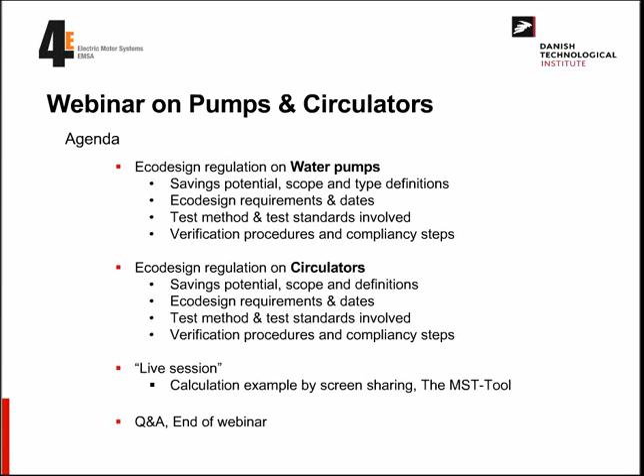As said, today's topic will be pumps and circulators and Ecodesign. The agenda will start on water pumps, talk a little about the Ecodesign regulation, what's been regulated so far, and how we actually do the compliance testing, at least in my part of the world, in Denmark, where we've done a lot of compliance testing on motors, pumps, and fans. I will demonstrate how to perform it, both for water pumps and circulators, which are two very different things. Finally, I'll try to illustrate an example on the motor systems tool in a live desktop sharing session, which we will hopefully succeed in today.

Yeah, this is just me, I don't think we need that. So let's get on to water pumps.

First of all, the regulation on water pumps was decided and published in the European Union Official Journal in the summer of 2012. It was called 547-2012, and it was based on the findings of the preparatory study of Lot 11, done years earlier by a different group. The first tier of the regulation started on January 1st, 2013, and the second tier in 2015, January 1st. So both tiers are actually active at this point in time.

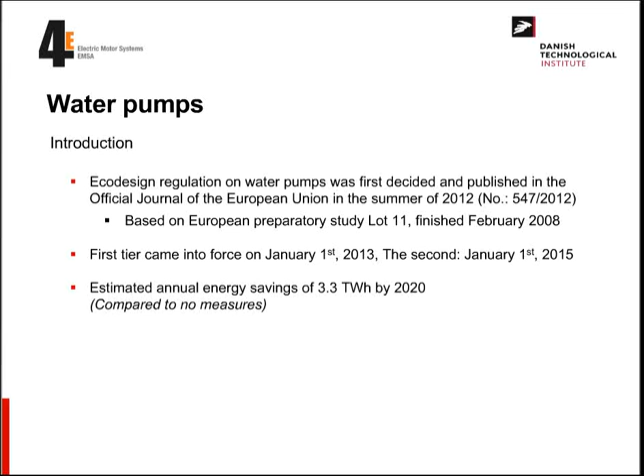From the preparatory study, we expect something like 3.3 terawatt-hour savings in 2020 due to these measures, compared to no measures at all. Another important thing to realize is that this regulation focuses on the component, the pump as a component - the efficiency of the pump itself, in this case 3 duty points. We do not take duty cycle or load profile into account in this regulation on water pumps. So that's good to know.

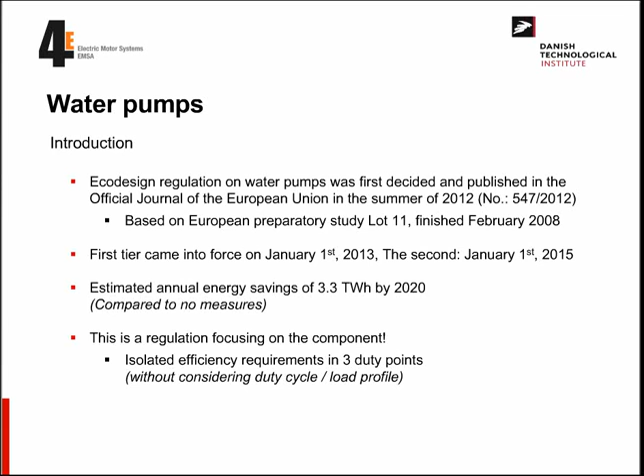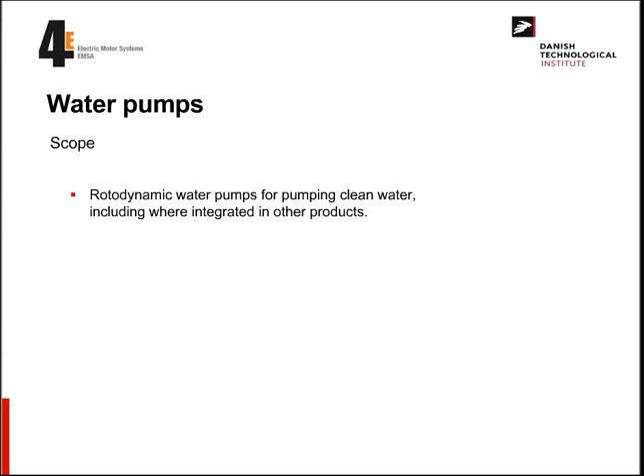The scope of the regulation is basically rotodynamic water pumps for pumping clean water, including pumps integrated into other products - quite a large scope. There are a few exceptions: water pumps designed for water below -10 and above 120 degrees Celsius are excluded. Also, firefighting water pumps are outside the scope. Displacement water pumps are outside the scope, and self-priming water pumps as well, outside the scope.

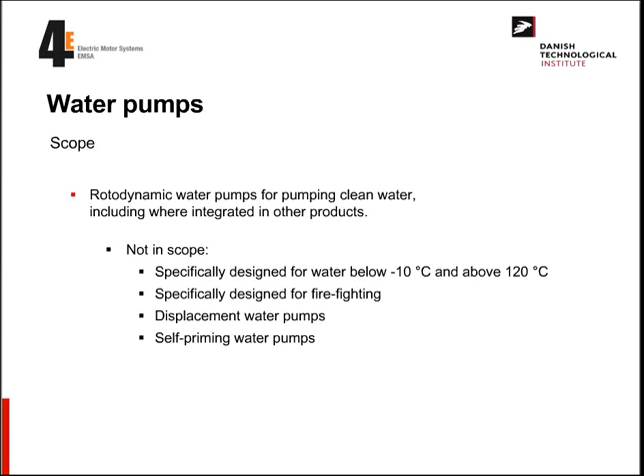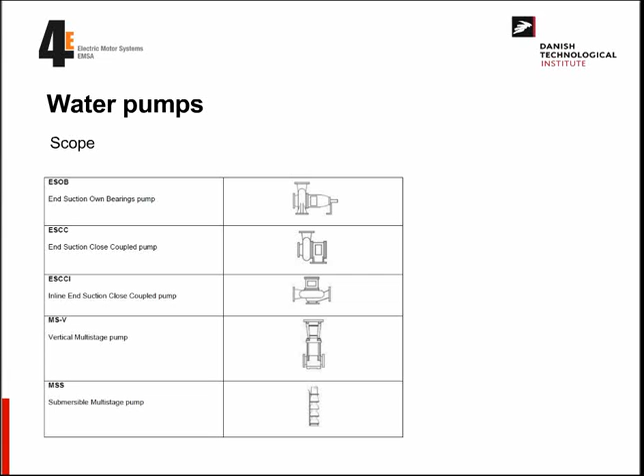When we look at the actual water pumps, there are 5 types recognized inside the regulation. 3 of these are what we call end suction pumps, and the more detailed limit of the end suction pumps is that they have to be designed for pressure less than 16 bars. The specific speed of the pumps has to be between 6 and 80 RPM. The rate of flow has to be above 6 cubic meters per hour, so the smaller ones are excluded, and the maximum shaft power is 150 kW, so the very large ones are also excluded. For the 4-pole machines, we have a maximum of 90 meters of head, and for the 2-pole machines, 140 meters of head as a maximum. So that limits the scope a little bit.

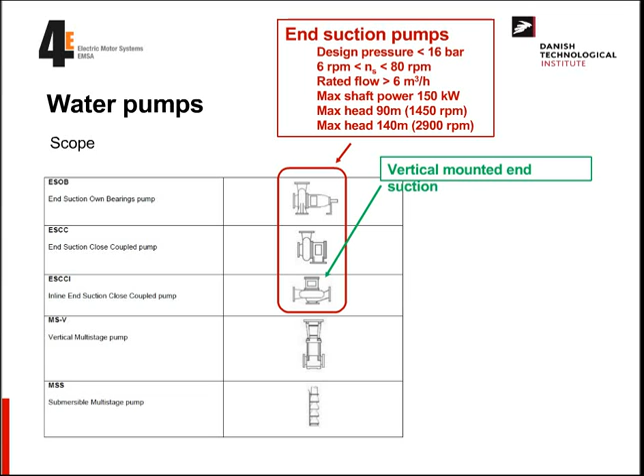All of these 3 are end suction pumps, but the one at the bottom is still an end suction pump, just placed in a vertical mode, so it's basically an inline pump in this case, but still it is an end suction pump.

Then we have the vertical multi-stage pumps, which is up to 25 bars of design pressure. The number of stages is of course above 1, as it's a multi-stage pump. When we do the compliance testing, you have to take the model which has exactly 3 stages inside, and the text also says that if you're not able to have that, you must take the closest number of stages above 3. These are only valid for 2-pole machines at 2900 RPM, up to a rated flow of 100 cubic meters. Also note that this kind of pump is not only the inline versions - sometimes you see a top-bottom pump, which is still a vertical multi-stage, and this would be included as well.

And the last type is, of course, the submersible multi-stage pumps - again, more than 1 stage. In this case, we have to test the model with 9 stages. It's only for 4-inch pumps in the regulation, 2-pole machines, and the water should be designed for between 0 and 90 degrees Celsius.

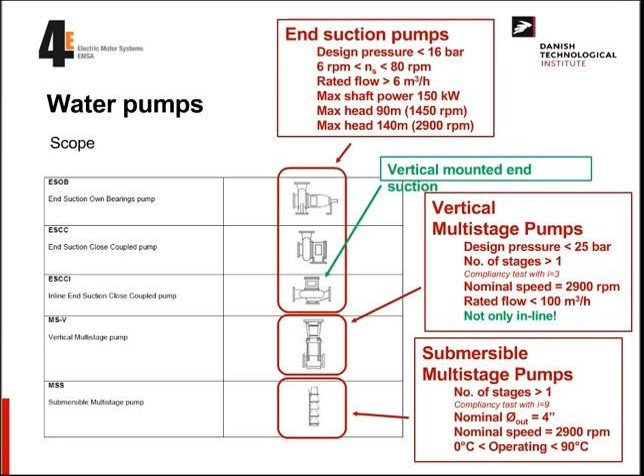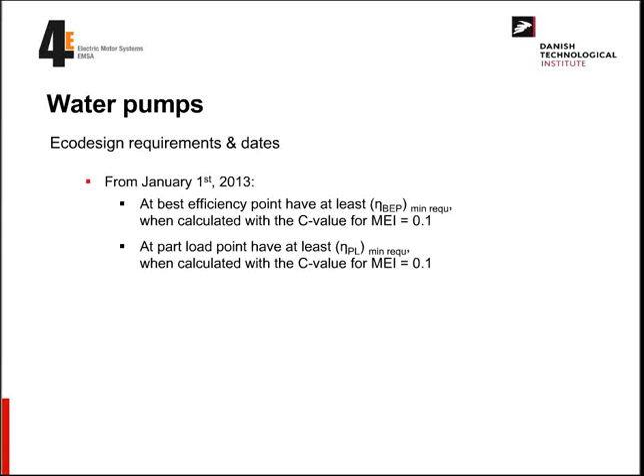So that's the scope. Then we have the requirements inside the Ecodesign regulation. From January 1st, 2013, we need to have an efficiency on the pump at the best efficiency point, calculated with a constant called C value at 0.1. This means we exclude the 10% worst pumps on the market when applying this measure. Also, another duty point is the partial load point, again excluding the 10% worst. And we have a duty point in what we call overload, which again excludes the 10% worst.

On the first tier, we also had product information requirements, a lot of them. I won't list them all, but you have to state the minimum efficiency index and year of manufacture, and so forth.

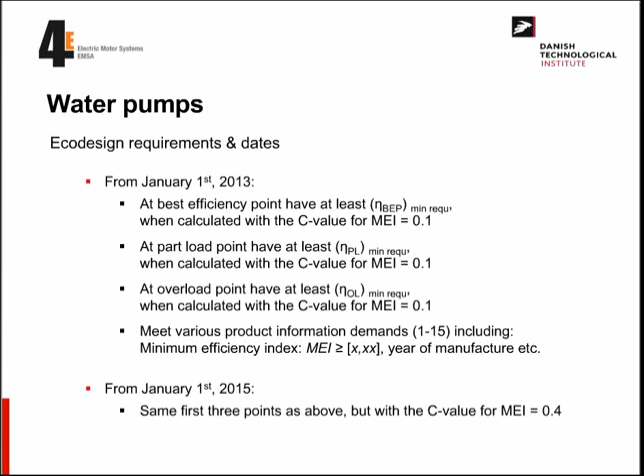In the second tier, which was this year, January 1st, we basically had the same three points: best efficiency point, partial load, and overload. But this time we increased the demand to 0.4, meaning we exclude the 40% poorest water pumps from the scope. This is effective now in the European Union.

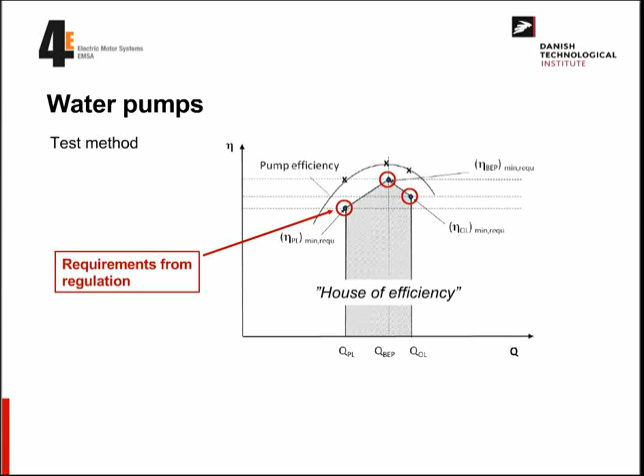If we look at this on a graph, schematically, we find what we call the house of efficiency, where we have the duty point for best efficiency, the duty point for overload efficiency requirement, and here the duty point for partial load. If we put some rings on it, we can see these are the requirements, and you can see why it's called a house of efficiency. When I do the compliance testing, I have to have all three duty points measured above these requirements.

Of course, there's a tolerance, but it needs to be above in all three cases.

The standard behind how to measure a pump in this case is the ISO 9906 from 2012, which I often refer to as the Bible of pump testing, as everything of importance in terms of testing a pump can be found there - how to measure differential pressure, how to calculate, how to measure electricity, and so forth.

And on the European level, very close to publishing, we have a standard called 16480. It's dedicated to the Ecodesign requirements, and has cross-references to the actual regulation. I think right now it's in a voting stage on the European side, but I'd expect it to be published next year, in 2016, at the European level.

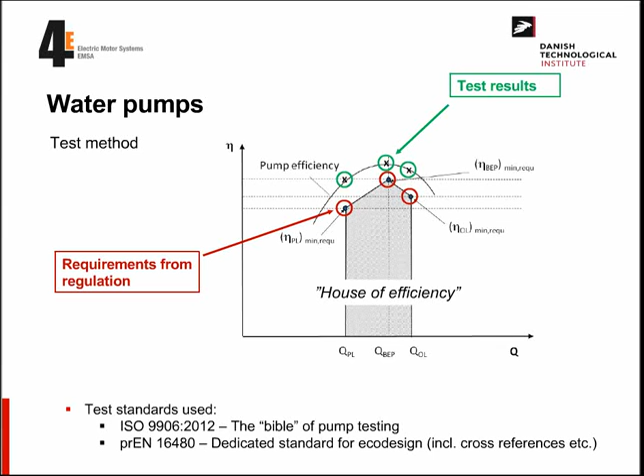I've also been working on the development of the standard and have been looking quite a lot into this during past testing.

At this point in time I'm not able to see exactly where this duty point is, the best efficiency duty point, but I can guess it. When I do that, I take a lot of duty points close to my guess because I need those for later. After measuring the complete pump curve, we dismantle the motor from the pump, and then we make a motor curve, but just a partial curve.

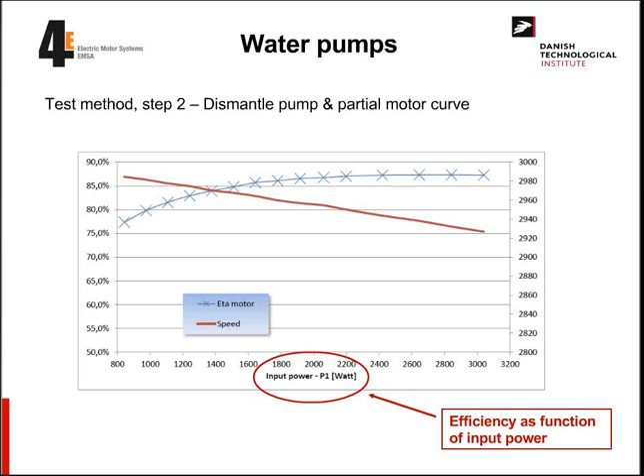So in the motor test facility, we test the motor isolated, and we have a curve. The blue curve is the efficiency of this motor at different input powers. Now, when we have these numbers, we can go back to the full pump curve, and when we know the corresponding efficiency of the motor in the pump at the duty point, I can deduct the motor losses from the total losses, thereby isolating the water pump efficiency completely. This is what I've done in this case.

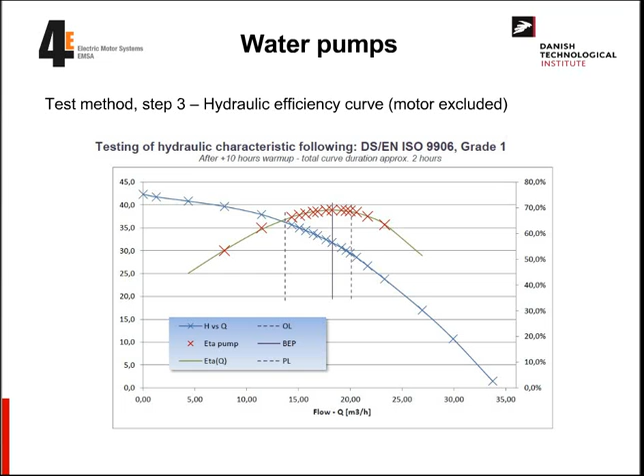All the red crosses are the actual measuring points, the duty points. The green line is the mathematical regression equation, which I can draw, calculate, and even differentiate, so I can find the maximum of this curve.

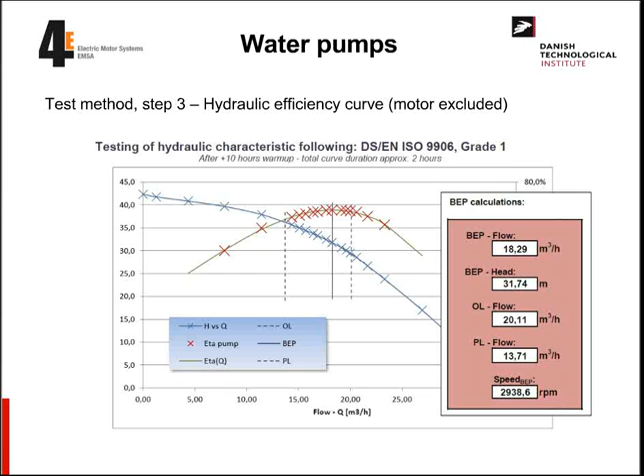In this case, the maximum was at 18.29 cubic meters per hour. From this, it's quite easy to calculate or just look at the head at this duty point, which in this case would be 31.74 meters. The flow for overload, which is 110% of the best efficiency point, would then be 20.11 cubic meters, and the partial load flow would be 13.71, which is at 75% flow. We also have the speed of the pump in this case.

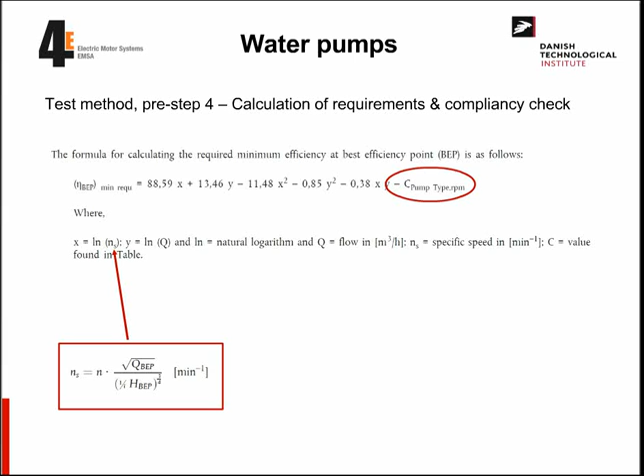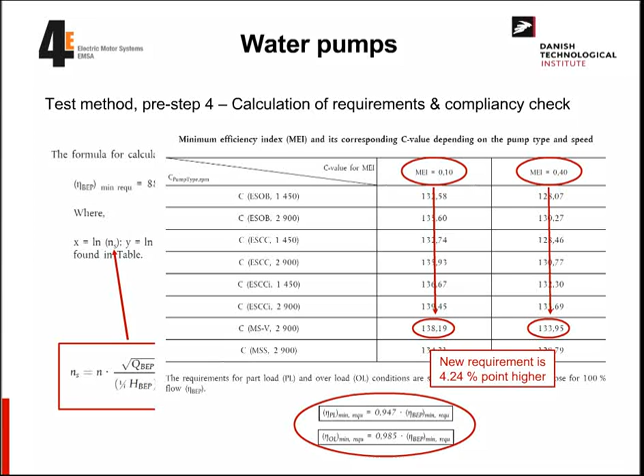So that's an increase in the requirements for the pump. Equally, on the partial load point and the overload point, it's just a fraction of the best efficiency requirement, and therefore it follows in the same manner.

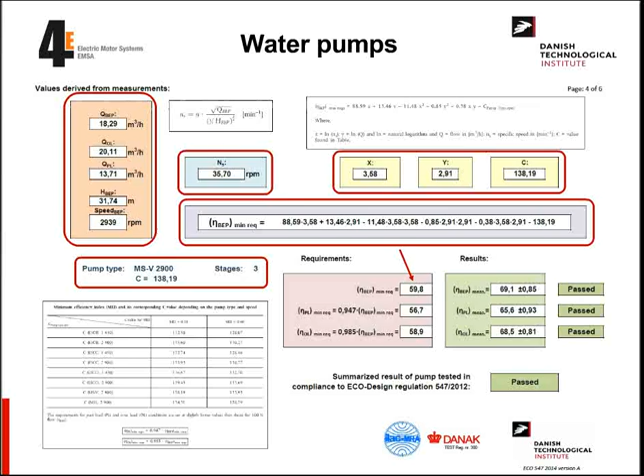You will notice that the constant I have used, 138.19, comes from the first tier. It's actually down here as well, the 10% tier. And if I zoom this scheme a little bit, you can see that this pump had a requirement of roughly 60%, and I measured it to 69, and the same goes for partial load and overload. So it passed all 3 duty points in this case, and the pump basically passed.

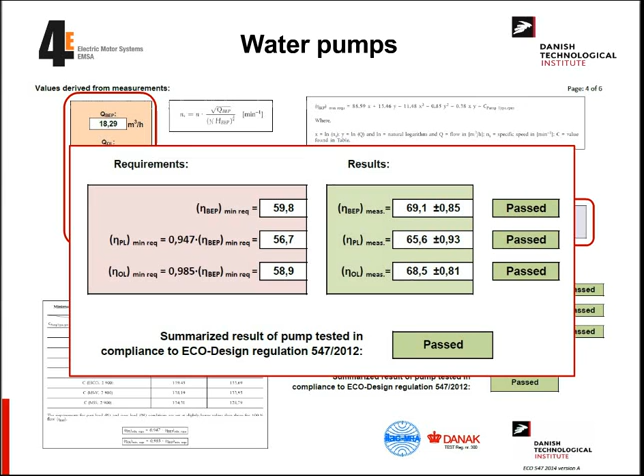So in conclusion, you have to measure the entire system, pump and motor. Then you have to isolate the motor efficiency to calculate the pump efficiency, and then you have to do the math and see if the pump passes, which it did in this case.

Very good. Going to the circulators. We have the regulation on circulators, which was decided and published already in 2009, at the same time as the motor regulation as well.

The input for the circulator regulation came also from the Lot 11 study in Europe, which finished in 2008. It started, the first tier was January 1st, 2013, just like the water pumps, but the second tier on circulators was not until August 1st 2015, this year. So it's not too long ago the second tier became active, but now it is.

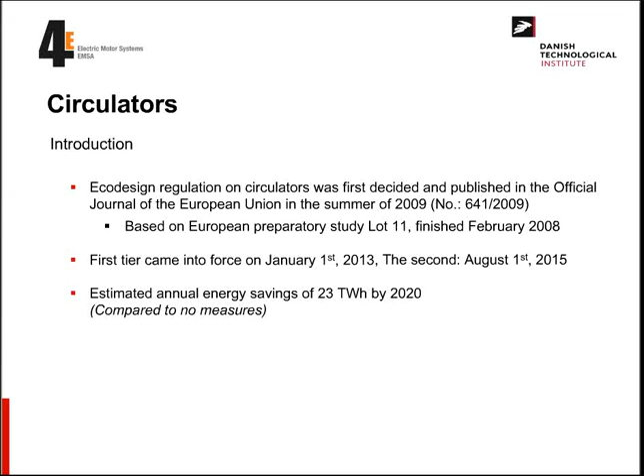Here you can see that the estimated energy savings from the circulator regulation is nothing less than 23 terawatt hours by 2020 compared to no measures. So the circulator regulation seems to have a lot more effect than the water pump regulation, but keep in mind that the intro to the circulator regulation actually started quite early, in 2009.

Another interesting thing about circulators is that the circulator regulation is basically what we in other parts call an extended product approach, meaning that a circulator is one small unit containing both a motor control and a pump, and thereby we can define different duty points and load profiles. So in the end, the circulator regulation is about a weighted power consumption in 4 duty points where you take load profile into account. In that sense, it's very different from the water pump regulation.

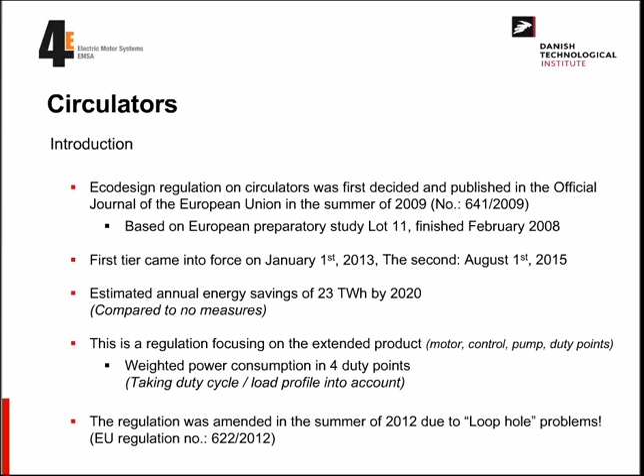Unfortunately, we saw in Europe quite a lot of aggressive partners in the circulator community trying to cheat the regulation. It was so severe that we needed an amendment to the regulation in Europe, and this amendment was published in the summer of 2012, closing some loopholes. I don't think they closed everything, but we did close quite a lot. This regulation is called 622 from 2012.

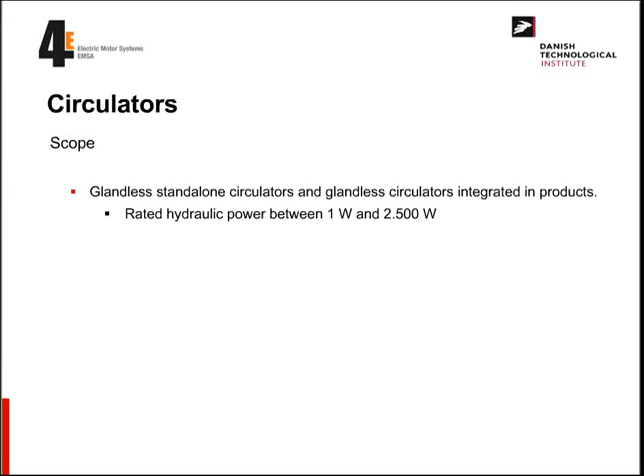The scope of the circulators is glandless standalone circulators and glandless circulators integrated into products with a rated hydraulic power from 1 to 2500 watts. So that's basically all circulators for heating distribution, I think, a lot of it at least.

What's not in scope is drinking water circulators. They have a requirement on product information, but not in terms of power consumption. Also not in scope is when you replace circulators with identical circulators on products which have been placed in the market before August 1st, 2015. Until January 1st, 2020, these circulators are excluded from the regulation, but after this, they are then included.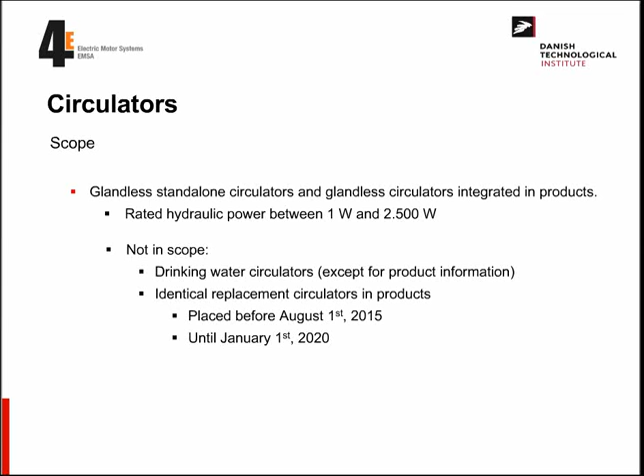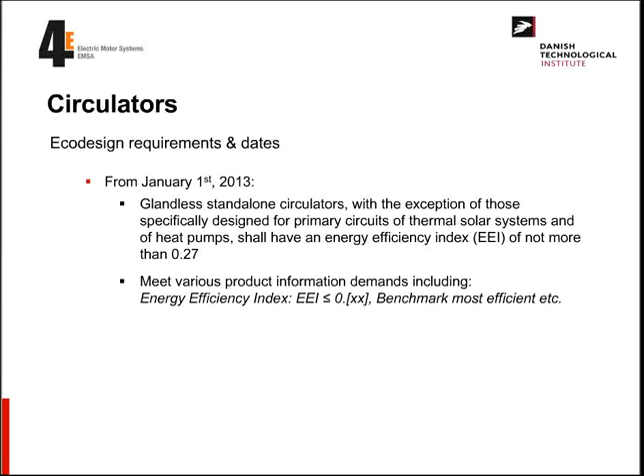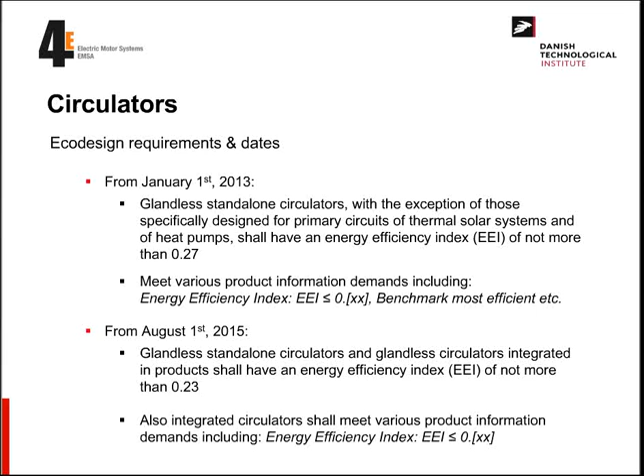The requirement is that the energy efficiency index in the first tier should be not more than 0.27, combined with a lot of product information, for instance energy efficiency index, benchmarks, and so forth. From August 1st this year, the same requirement was set down to 0.23, and also integrated circulators should meet the demands on product information and so forth. So 0.23 is the requirement today in Europe, and the way we test this is basically in a proportional control mode on the circulators.

You define a 100-100 flow and head duty point, and then you draw a line down to half the head at 0 flow, and you make 4 points at 25, 50, 75, and 100% of flow. Then you compare this weighted measured power consumption to a reference power. The reference power is basically calculated from the hydraulic power, which you find in the 100% duty point. I will show that later.

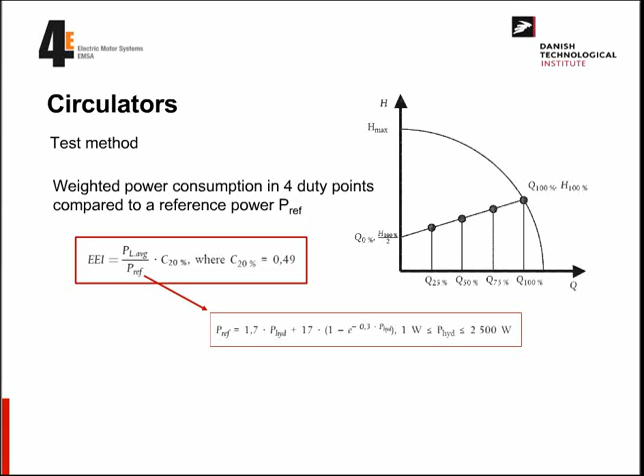The standard for circulators is, of course, the ISO 9906, the bible for pump testing. This one is valid here as well. And then we have dedicated standards in the European community called the 16297 series. We have parts 1, 2, and 3, which are dedicated standards for circulators in terms of Ecodesign testing, including cross-references and so forth. Part 1 is the general how-to, part 2 is for standalone circulators, and part 3 is for integrated circulators.

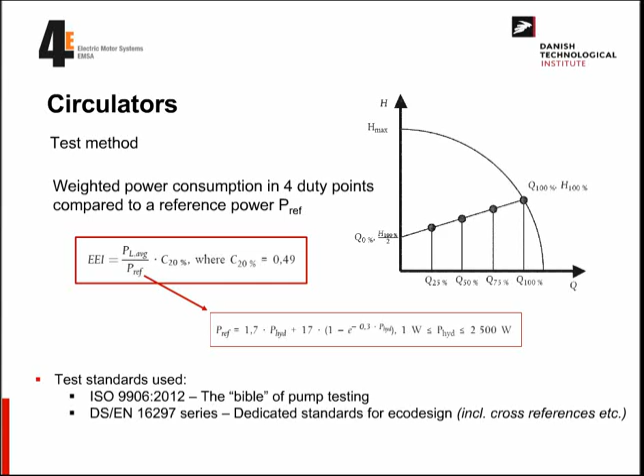What we do in my lab is make a full pump curve as the first thing. We warm up the unit overnight, more than 10 hours as it says in the standard, but we do it all night to avoid any run-in phenomena. In this case we cannot separate the motor efficiency because it's an integrated circulator, so we basically calculate the hydraulic efficiency already at this point.

I have the crosses illustrating the duty points that I took, and we have a lot of duty points very close to the maximum hydraulic efficiency point. In this case, the maximum hydraulic efficiency was at 1.67 cubic meters per hour on this small circulator.

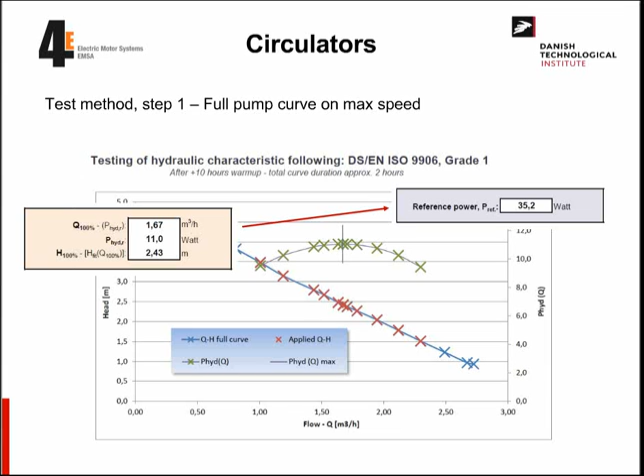In this duty point we also had 2.43 meters of head, and when we know these two numbers we can easily calculate the hydraulic power in this duty point, which is 11 watts. The 11 watts we then use to calculate the reference power, as I showed before. In this case the reference power of this circulator would be 35.2 watts, so that's a number we're going to use later.

Now I've zoomed the graph a little. This blue line is the full pump curve as before, and this cross is the duty point I just found, 1.67 and 2.43 meters of head. I draw a line on half the head, and then I put in the 4 expected duty points as it says in the standard.

From each duty point I have a 5% limit and a 10% limit in both directions - 5% below and 10% both above and below, because there are certain rules for which duty points you're allowed to use directly and which you're allowed to use as linear regression and so forth. But in this case, these are the four duty points I want to achieve in the test.

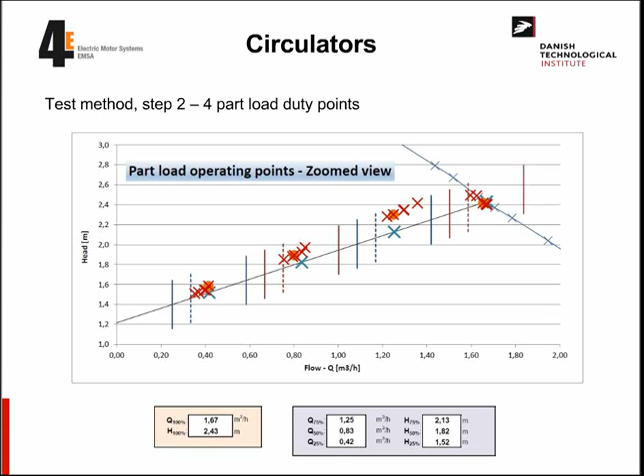This is what I actually tested. I programmed the circulator to do proportional control, and we did a lot of duty points, as you can see. The orange dots are illustrating the duty points I actually used - this one, this one, this one, and this one. These are the 4 duty points that I actually measured and are using in the calculation.

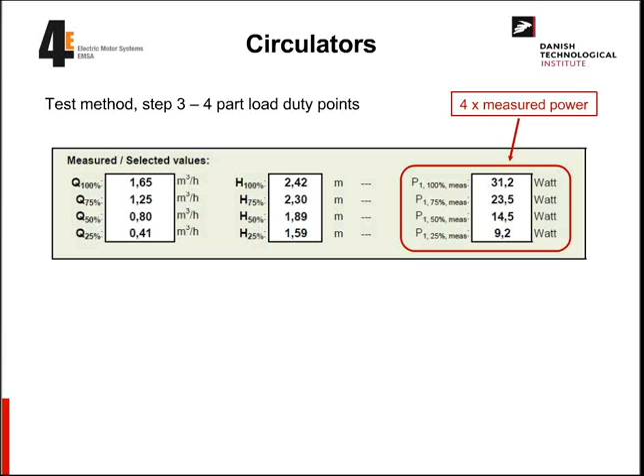If we proceed a little in the calculation, we have to weight these powers, and for that purpose we have a weighting scheme that's been used for many years in the European community. We often refer to it as the Blaue Engel weighting, but it's basically an average of which flows a standard circulator operates at in a standard heating system. That means the 100% flow point is only operated on average 6% of the time. The 75% duty point is only 15% of the time. 50% flow is 35% of the time, and 25% flow is 44% of the time - so almost half the time a circulator runs at 25% flow.

Therefore we have to weight these power consumptions, and that's what we do here - going down to 1, 3, 5, and 4 watts, we can add these, which gives 14.5, then we divide it by the 35 from before, and we also multiply it by a factor called 0.49, which gives me a number called 0.2023. So the final energy efficiency index on this circulator is 0.20, which means it passes both tier 1 and tier 2.

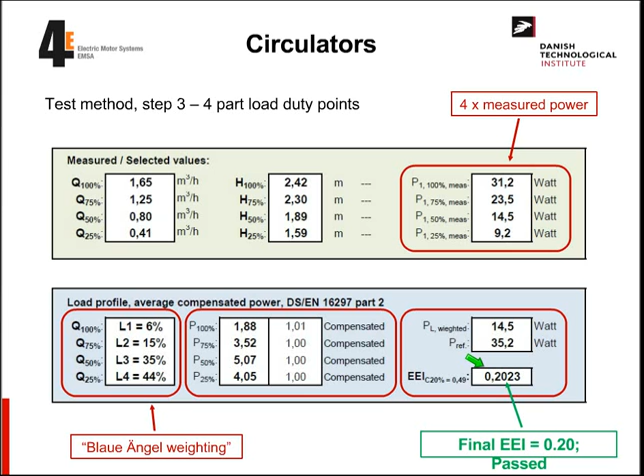What happens if a circulator does not pass the test? Then the manufacturer has to deliver 3 of the same circulators, and all 3 have to pass on average. Then the circulator will pass anyhow, and the first specimen is considered a statistical abnormality.

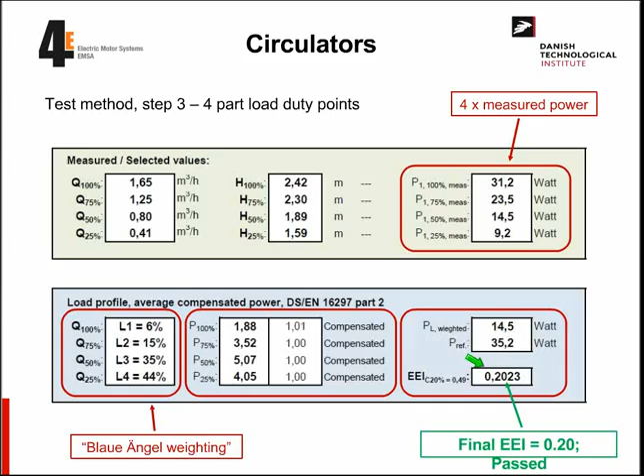I will now try to go to the live thing, but first I will recap. If we look at the circulator, we have the 4 duty points looking like this, if you can recall that. Also recall the time in which the different flows are used: 6, 15, 35, and 44%.

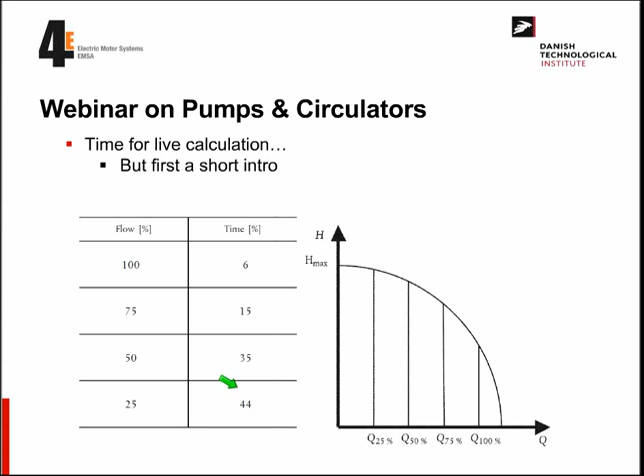The example I want to use today, you will be able to find on our webpage later on. If we have an example of a circulator system with 6,000 hours per year running time, in the winter period, closed in summer, then the spread of this flow would be something like 360, 900, 2100, 2640 hours in this distribution of Blaue Engel.

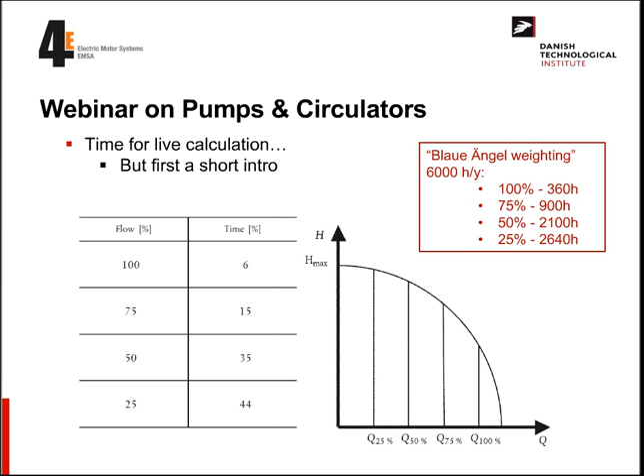I have selected a circulator with 3 fixed speeds for the example. In this case, we use the pump curve for the maximum speed, called number 3, and the related power consumption we find down here, and also the related efficiency of the system looks like this. If I put in my duty points from the Blaue Engel, it would look something like this.

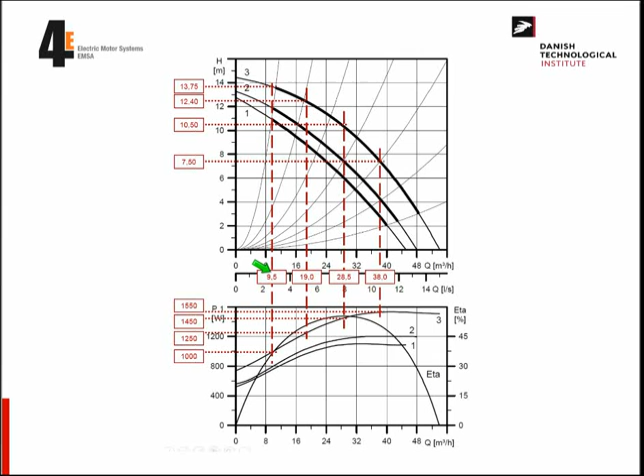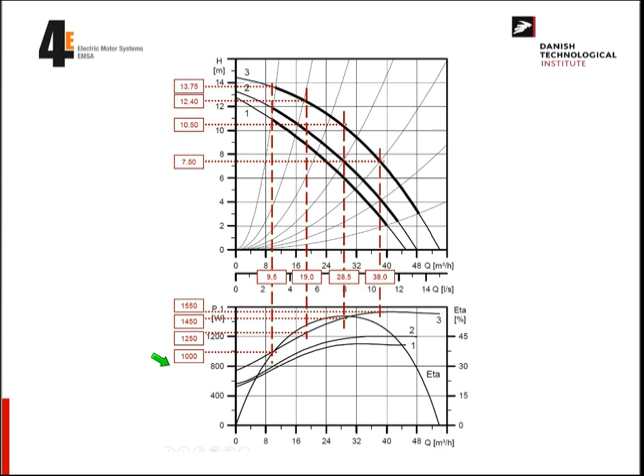We have a maximum flow of 38.0, which gives me 75% of 28.5. We have a half flow of 19 and a fourth flow of 9.5. The corresponding heads we have up here, and the corresponding power consumptions we have down here. This would be my before situation.

In my after situation, I would select a pump with proportional control and the ability to change the speed of the pump, which is necessary. We will achieve the same flows, 38, 28.5, 19, and 9.5. But in this case we have less head, because we do proportional control, and correspondingly lesser power consumptions would apply.

So keep this in mind, and then I will try now to use the desktop if I succeed. Let me see. Share. I think we are there.

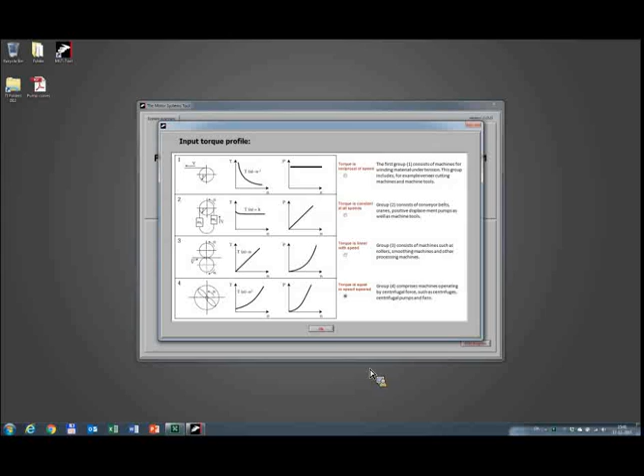I will now open the motor system tool. I don't know if you have downloaded it, but you can, and it's free. Also, you can use the other webinar to introduce the tool, so I will just introduce it here quickly.

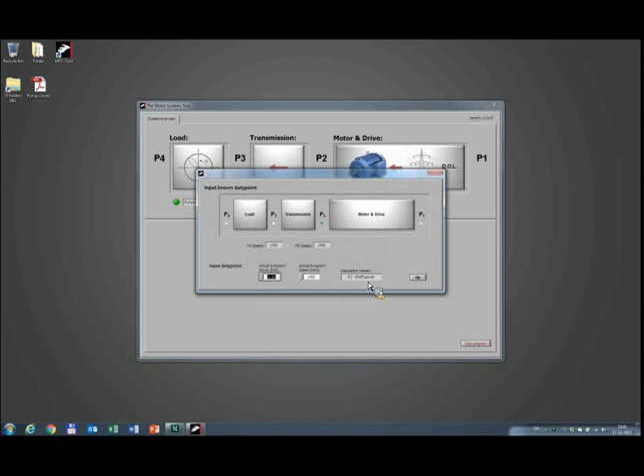We have a pump, we don't have a transmission, and we don't really know what motor we have, but I'm guessing a 1.1 kilowatt IE1, and I say OK to that. It's direct online. Then I need to put in my duty point, and for that I will open the before situation.

I hope you can see in the background I have the before situation with the fixed speed pump. The first duty point would be my 100 point, and here you can see that I have...

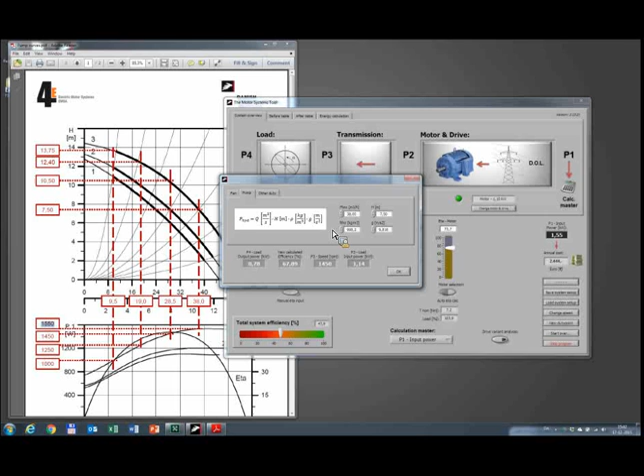Here I have an input power of 1.55 kilowatts, measured from the wall, and I will put this in. We have a pump, and the head of that first duty point would be 7.5, and the corresponding flow would be 38. When I put these two numbers in, the motor systems tool calculates the hydraulic power, and when we know the input and output power, it's quite easy to calculate the efficiency, in this case almost 68.

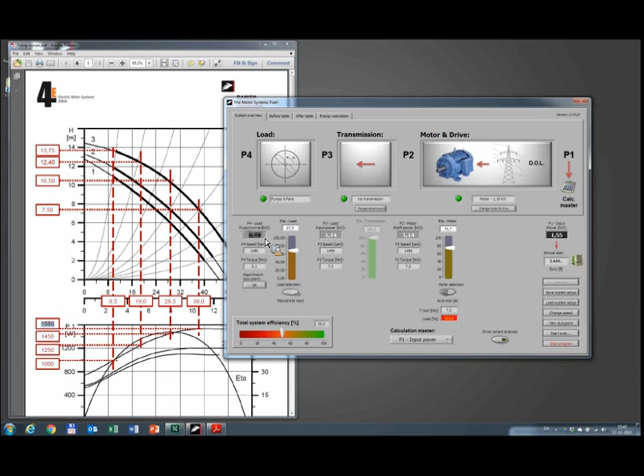Then we have basically the first situation here on the before situation: 1.55 kilowatt input, 0.78 output. If I go to the before table, I want to add this line. From the time schedule, recall the 6,000 hours - 6% of those would be 360. So if I input that, this is my first duty point.

And then I change the duty point to the second duty point, which is 1.45 kilowatts. I change also the hydraulic things, which in this case would be 10.5, and it would be 28.5. I have a new hydraulic output, 0.8, a new efficiency calculated, and this would be my second duty point.

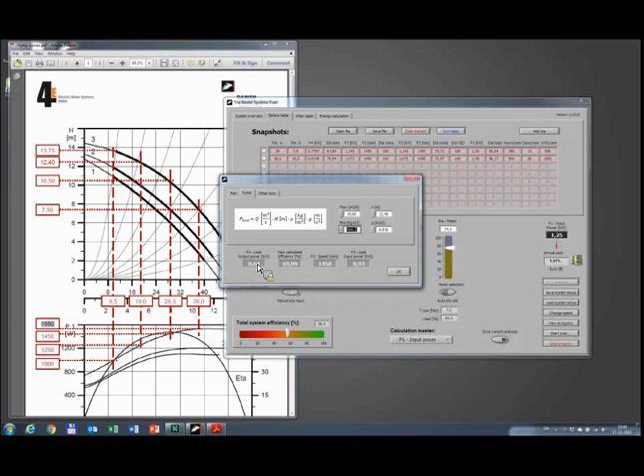I want to add this line, and now I have 900 hours because it's 15%. The third duty point would be 1.25, and on the third duty point I would have something like 12.4 and 19 in flow. That would be, again, new hydraulic calculated, a new efficiency. And I would add this line, and this would be 2,100 hours because it's 35% of the 6,000.

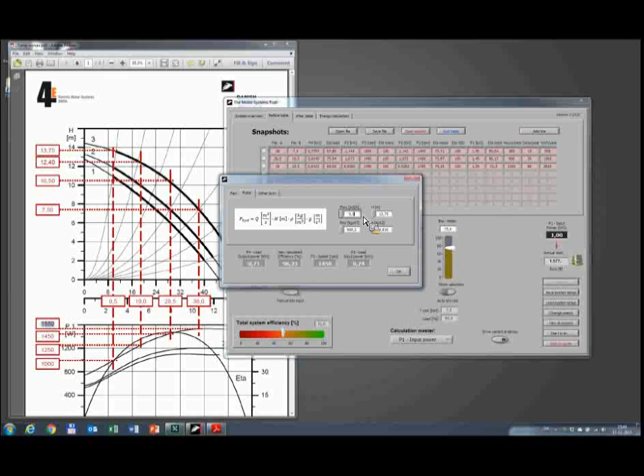And the last duty point would be 1 kilowatts, and the hydraulic performance would be 13.75, and also a flow of 9.5. Okay, I want to add this, and I want to have this for 2,640 hours, and there you go.

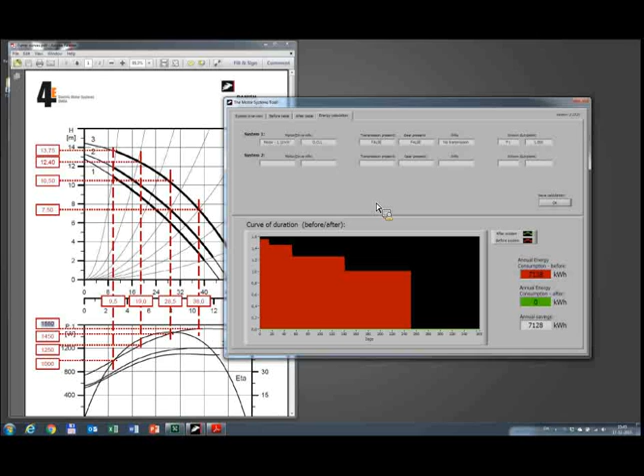So now in the before table, I have the load profile. And if I go to energy calculation, I can basically see my load profile in the curve of duration. And I can also see that the annual energy consumption would be something like 7,128 kilowatt hours for this system.

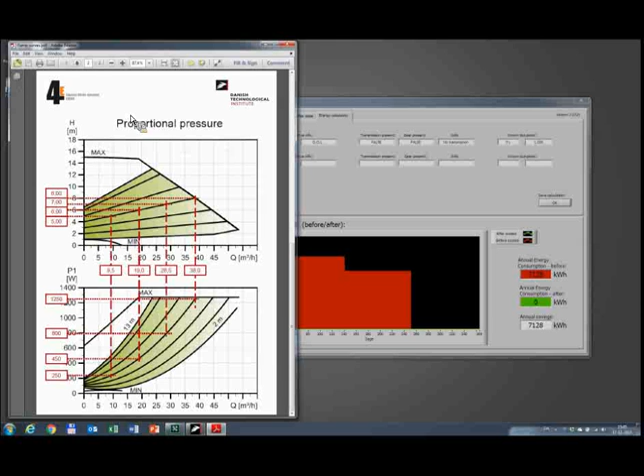So now I want to put in my after system. In this case, it looks like this. I go to the after table. I start with the first duty point here, which is, I go to this, like this, and you can see that in the maximum duty point in the new system, I would only have 1.25 in input power.

And the hydraulics of that duty point would be roughly 8 meters and a flow of 38 as before. We get a new calculation, 0.8 in hydraulics, 0.9 in efficiency, and so forth, looking something like this. I want to add this, and maybe it's the same load profile. I guess it is.

I take a new duty point. In this case, the power is 0.8 kilowatt. In the second duty point, I have 7, and I have 28.5. I apologize if this goes too fast, but a little bit on a time pressure here.

I add the line, it's 900 hours, and the third duty point is 0.45, and the hydraulics of that duty point would be 6, and it would be 19.

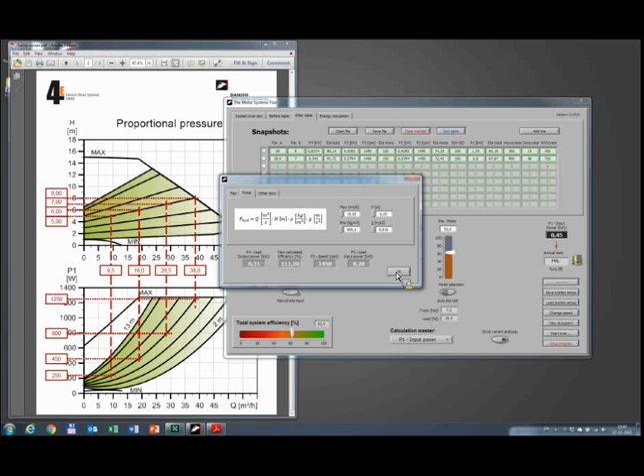Something is now wrong. I just hate when this happens. Let's see what's wrong. Did I do something wrong here? Oh, I just hate when this happens. 6.

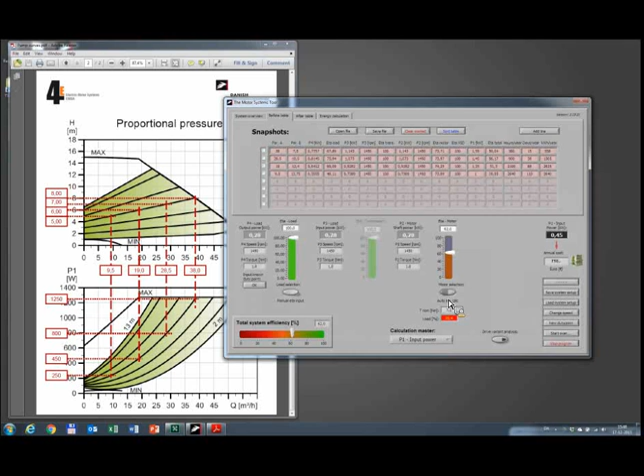Okay, I apologize for this. Well, I should better stop now because this is not very good. I'm sorry to say, but I hope you get the idea of the motor systems tool. You can basically see the before and after situation. The red, of course, is the before situation, and the green is the after situation, and you can basically see the difference directly. You have the tables and so forth. I apologize for the mistake I just made. I cannot,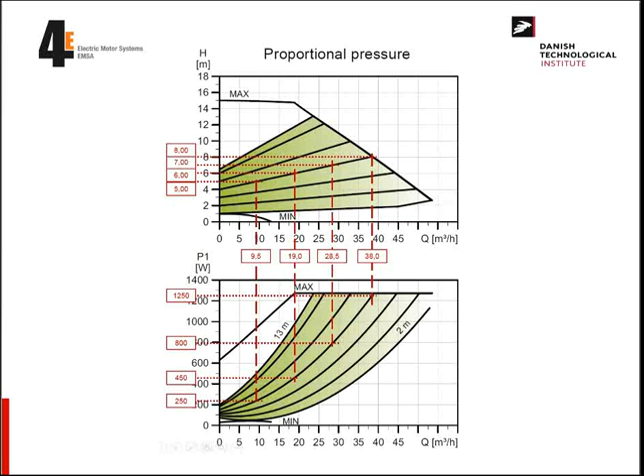Other than that, I really hope that I was able to explain how we do the compliancy testing in Europe on water pumps and circulators. We have some experience in my company in doing this, and we have experience from the market that we see that both the circulators and the water pumps have improved in efficiency over the last 5 years, I would say. So that's very positive to see that regulation is actually working in real life.